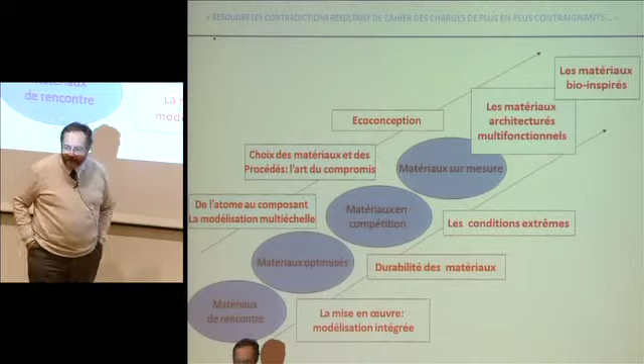We'll discuss modeling again when we talk about the implementation and integrated modeling. Of course, in only one hour we can't discuss all of the issues of durability and behaviors of materials, but we're just going to be brushing upon a few aspects.

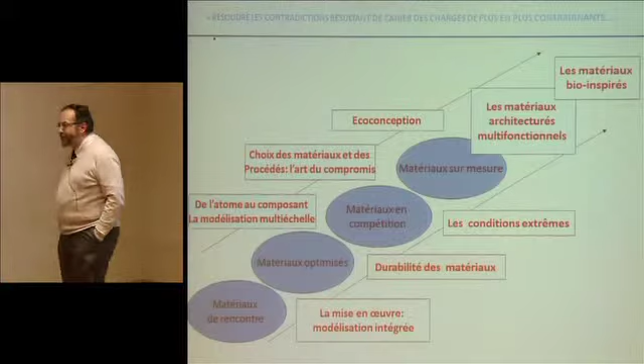The lecture will discuss both wear and creep as an illustration of typical durability problems, and we're going to be looking at a fast-moving trend, which is the self-healing trend for materials. There will be a seminar by Eric Andrieux from INSA Toulouse, who's going to tell us about one of the aspects, which are issues of corrosion.

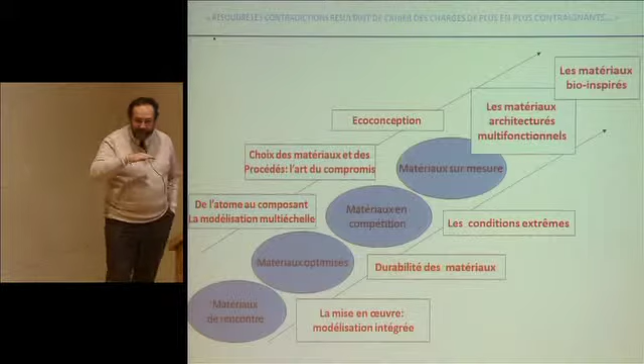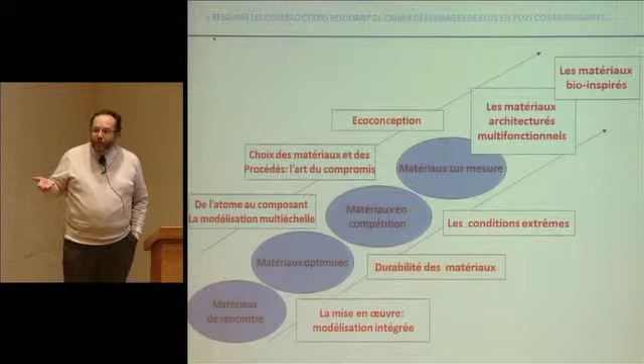And for this afternoon's working group, I decided that we should focus around corrosion, mechanical corrosion. We'll have a certain number of presentations about these issues. So we won't cover all of the problems of materials durability, but just try to illustrate with one given case, which is the case of corrosion, interaction with the environment, and what the questions are that arise from that.

So this diagram is something I showed you already when we discussed problems with design, and I said that what was well developed were methods where you design for infinity, basically for things that last forever. But that doesn't really happen, because there's a certain number of degradations that are going to occur as the component is used. It can be degradation caused by the fact that you have a deferred response.

Deformations caused is what results by creep, where there's only been elastic deformation at a given time. You have fatigue, which is a kind of a treacherous phenomenon, because it looks like nothing is happening, but there's more or less something happening, and then eventually it breaks. If you look at the clip on your pen, you take it in and out of your pocket, and then after a while the clip on your pen drops.

That's typical. And then there's corrosion, and then there's wear, which is basically behavior of materials in time in situations of contact. So in terms of design, there are two ways of envisaging the problem. One is to say, I'm going to place myself in a situation where this is not going to happen. For instance, operating temperatures which are well below half of its melting point, well below the fatigue limit. Of course, I can try and design things like that, but then that means you have over-dimensioned components, not necessarily a good solution.

Thermal treatment, surface treatment, protective treatments - typically what you're doing when you're hardening a surface to make it more wear resistant, or more fatigue resistant. So that's the overview.

What we're going to be discussing today are a few of the key issues in materials durability, and one of these key issues that comes back over and over again is the fact that usually you want to do accelerated testing to say, can I reasonably evaluate the lifespan of the component?

There's a well-known story, I think it was at EDF. He was asked, when's the best time to change a post? And he said, well, it must be just before it falls down. But that would mean very long testing, wouldn't it? So how can you have accelerated testing? Usually what you do is that you increase the conditions of solicitation, increase temperature, increase the stress, increase the strain rates when we talk about materials, but essentially, if you change the conditions of solicitation, you're just accelerating the phenomenon or actually changing the physics of the phenomenon.

That's something that you can find for the durability of nuclear power stations, but also waste storage, engine durability, or turbine blades and so on. How can you accelerate the testing?

Second aspect that's critical is to have a look at the systemic issues that involve materials, environment, and geometry altogether. That occurs a lot in corrosion and wear.

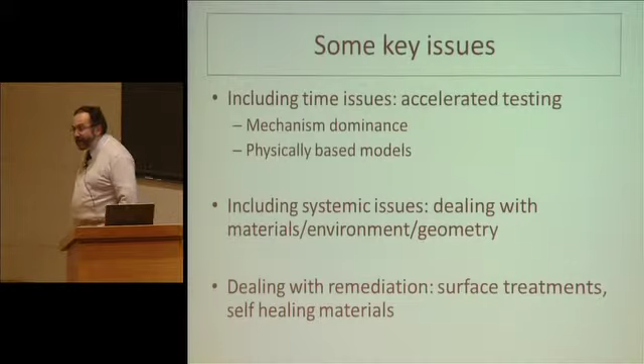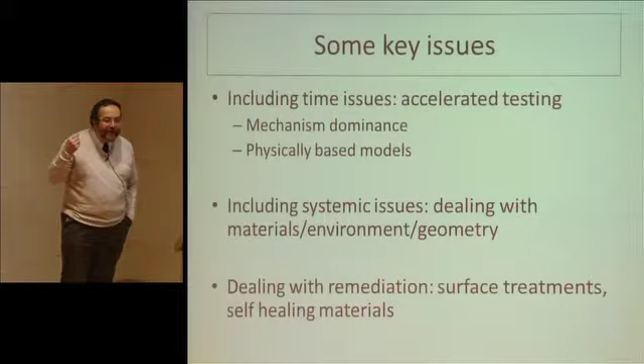And the third point is how can you try to deal through remediation. I told you about surface treatments, but I'll also try to tell you about self-healing systems, which will give us a glimpse of the last lecture on bio-inspired materials. How can you heal the damage as it is occurring?

So I'm going to start by telling you about creep, how one can reasonably expect to have accelerated creep testing. Then the question of wear.

It's actually quite an old approach, but I think it's very valuable and hasn't been sufficiently exploited. What I was saying in the first lectures is that these problems are so major that we often tend to confuse qualifications of materials and understanding of the phenomenon. I think we need to understand the phenomena with materials that allow us to understand.

The case of corrosion, discussed by Eric Andrieux, and this afternoon's workshop, we will hear more about hold-over time in the lecture about extreme conditions. Of course, the seminar will be dedicated to the aging of materials under the effects of radiation, where again time is of the essence.

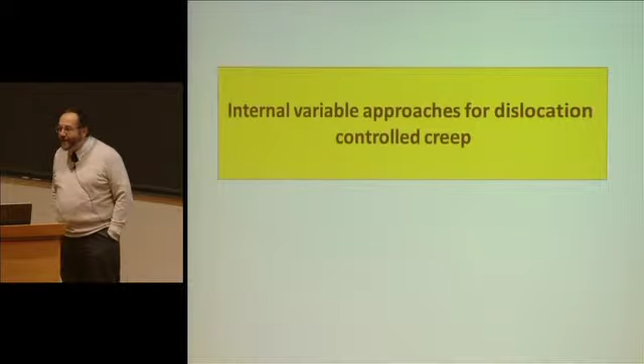So, creep, wear, and self-healing solutions. Creep is actually quite interesting because this is an approach that was developed over the past 20 years or so, used across several systems, with a lot of improvements in the principle, but based on a physical understanding of plasticity phenomena.

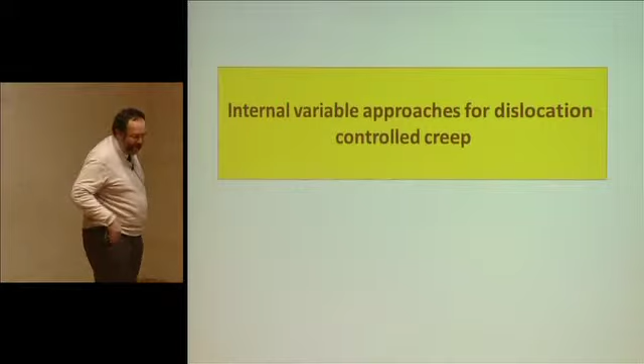The cases I'm going to study are those where the plasticity of the alloys is based on dislocation. The very simple question you can ask is: what if I'm testing traction, pulling—what is that going to tell me about aging and creep, which is long term? So how long, for instance, can I operate a thermal exchange array in a nuclear power station?

The basic idea was to say, essentially, we're trying to extrapolate over time, and in order to do that, you need reliability of the mechanisms. If you change the type of solicitation, you can change the deformation mechanisms, and the result is that you can be completely off the mark when extrapolating.

So this appeared in the 70s, quite a while ago—what were called Ashby creep maps, Ashby again—to say there's a constraint on a material, but it's the constraint versus rigidity, a hardness, at a given temperature. What's relevant here is the importance of thermally activated phenomena compared to the melting point, which is also a measure of the system's cohesion.

So when you map deformation here, we're talking about power of 10, temperature, and then a normalized shear stress. And the idea is that if you have very low stress...

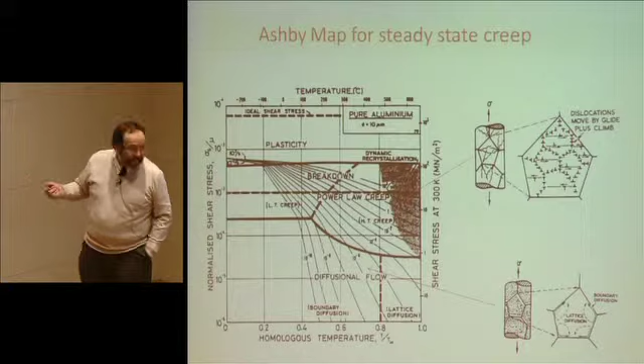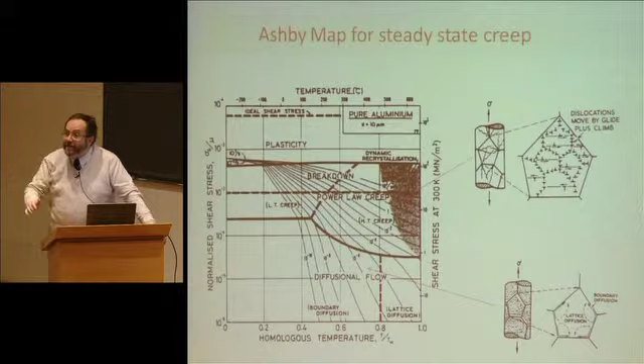So these models open access to stationary creep phenomena. You have a given constraint, a given deformation that is time dependent. Initially, there's going to be a transitionary state, and then an accelerated speed.

And then, in the 80s, under the influence of Cox and others, here it's for highly pure aluminium. The question was, what is the difference between a creep test and a pulling test with an imposed deformation speed.

performed in a system where creep is controlled by dislocation movement? So here the idea was to say that a dislocation is silly and it doesn't know whether it's working under imposed pulling or a creep. So if you test, if you impose a stress with a given speed, a given constraint, in your creep test, you may be able to predict what's going to happen when you apply a constraint and that you're measuring a deformation speed.

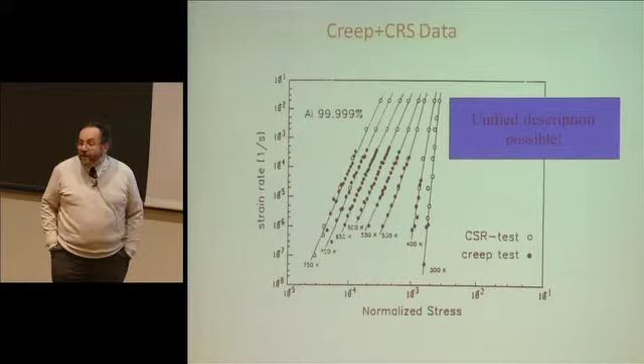So you have a few tests here that were carried out at different temperatures with different degrees of stress, of strain. The creep tests are the full ones, and the other ones are the hollow ones, and essentially they are actually quite well aligned. So at least in these scales of temperatures, there's no real reason to believe that you have different types of deformation.

And it's not always the case, but it was here. So if you continue the parallel here, and if you say that dislocations are stupid beings, if you have a stationary, a constant creep condition, it's essentially stable, and speed of deformation is essentially stable too. You have the deformation speed based on deformation, you have a transitory period here, you have secondary creep, which is stationary, and then the material is going to become damaged. Of course, damaged means different things, but basically, for a given constraint, deformation accelerates.

If you look at a stationary creep, minimal creep is a stationary structure dislocation state. But if you look at the behavior in terms of speed of imposed stress, the state of saturation in this type of test which you can obtain with very high deformation, and the equivalent in terms of imposed stress, speed in the stationary state in creep. So it was quite simple here.

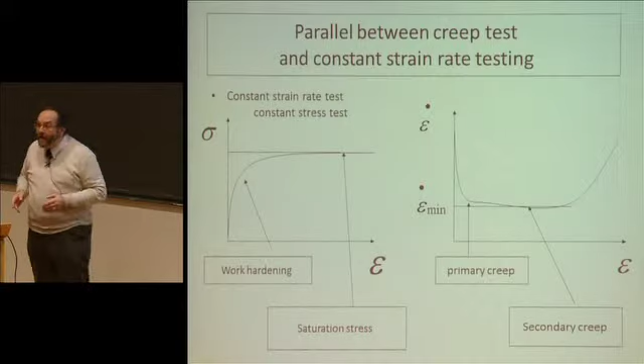You have a dislocation density that's essentially constant because of the balance between what you're creating and what you're annihilating. When you have more and more, they tend to annihilate each other more easily in pairs of dislocations, plus B minus B, and you have a dynamic balance with a defined speed that should describe the stationary condition, which is dynamic with imposed constraints.

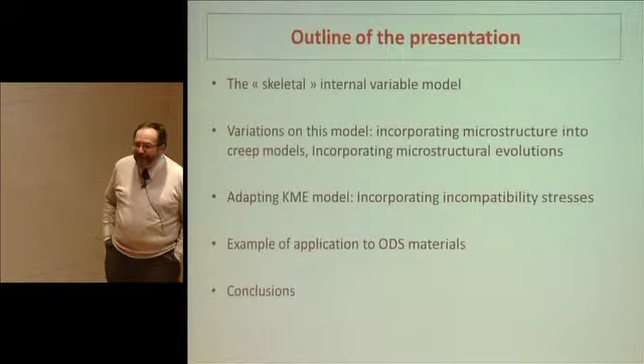Let me start by showing you internal variable models, and I think they're actually excellent value for money. They're simple but allow you to explain lots of things. We'll then see variations on this model, incorporating microstructure. We're going to see how incompatibility constraints can be built in, how we can try to describe certain types of ODS materials, some that are actually ill-adapted, unfortunately, the ones that we really would like to be using, and then we'll reach today's conclusions.

So, the skeletal model, the most elemental model in terms of the approach of variable internal plasticity, is that you have one variable: the dislocation density. So, of course, you can fine-tune the model. You can have fixed, mobile dislocations in the different planes. You can make things much more complex if you want to. But what can you do with the simplest version?

Second point, the dislocation motion to overcome obstacles contributes dominantly to plastic strain, where direct diffusional flow is dominated by the deformation by dislocation. Other obstacles can be either other dislocations or fixed obstacles, such as grain boundaries, precipitates,

and they control the mean free path of dislocations and the dislocation storage kinetics. They're going to be terms of annihilations. They can be annihilated in pairs, and then they're going to be terms of storage, which are essentially going to be the obstacles encountered where they can't move further.

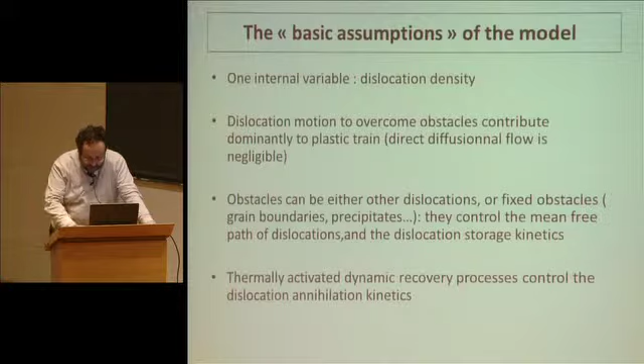And then the dynamic recovery processes control the dislocation annihilation kinetics. So the basic model here, which you can work on indefinitely, is the Kocks-Mecking model, which is also very simple in principle.

There's a relationship between speed of deformation and constraint, but the idea is that it should be considered not as such, but in relation to the intrinsic resistance of the material you're examining. This intrinsic resistance is that of the crystalline network, but as you are deforming the material, you're accumulating dislocations, which increases the material's resistance.

So the Kocks-Mecking model is designed to normalize the constraints you're applying based on the resistance of the material, which itself is connected in a pure metal to the dislocation density within that material. That's the meaning of this first equation: the constraint normalized by the reference constraint, sigma with a circumflex, must be equal to the speed of deformation normalized by the reference speed of deformation.

And the idea is that the reference constraint is the square root of the dislocation density. So you're actually overcoming the obstacles, which is essentially dislocation. You could also add precipitates, grain boundaries, and so on.

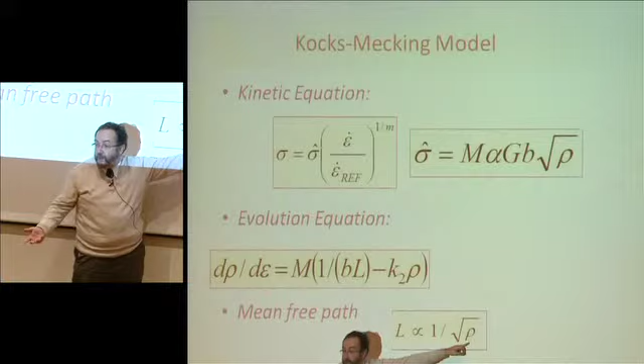So what remains is, what is the mean free path here? When I only have dislocations, it can be connected to this amount here, the average distance between dislocations. If you add precipitates or grain boundaries, the mean free path is going to be modified by these new obstacles.

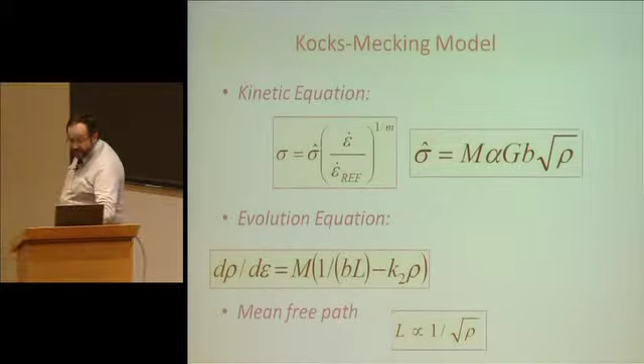So this can actually be integrated easily, and by a sort of miracle, you end up with a Voce law, which was developed long before these approaches were developed. It's a classic description of mechanics for plasticity with saturation.

And what you have here, in fact, I don't know why it turned into bright purple, but you have this Voce equation here. The difference between that and a purely phenomenological interpretation is that you have a direct interpretation of various parameters.

So in the law of Voce, the constraint at saturation is going to be connected to the storage rate and annihilation rate, and the θ2 term that you have in this deformation is essentially how the deformations are going to be stored initially in stage 2 of the deformation.

You can very well integrate the equation in the same manner, not with a constant speed, but with a constant constraint. What you obtain is a Voce equation for creep, rather than for imposed deformation speed.

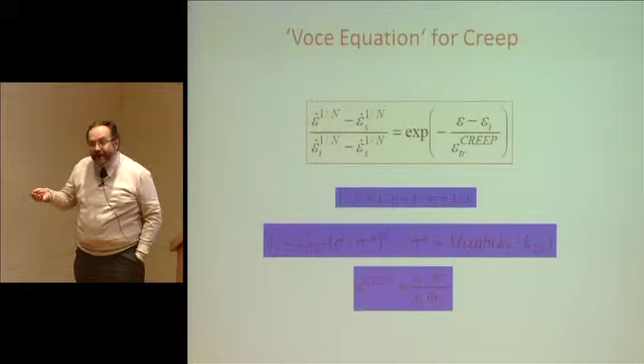What you can do is test. You can have tensile tests at different speeds. You can have jumps. You can have tensile tests carried out at different temperatures, and based on that, you can extract the parameters allowing you to adjust your Voce traction law and use these parameters to predict creep.

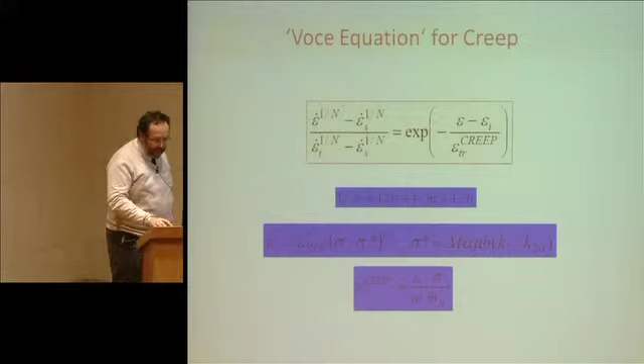So obviously you do have the first part of creep. It won't give you the tertiary creep because other mechanisms become involved at that point.

So if you want to have variations of these models by including, for instance, microstructures, what you can do is inject grain size. Incorporate grain size that's going to appear in the mean free path. When the grain size is above 20 microns, that can very much have an influence on the mean free path.

When grains are smaller, you're going to feel the dislocations in the grain more in terms of dislocations accumulating, and there are going to be other terms here, terms of internal constraints because of grain-to-grain incompatibility. Usually when you reduce the size of the grain, the more you do that, the more you're going to need to look closely at dislocation.

Then if you want to include a precipitate, the most natural way to do that would be to include it as an additional threshold. Say the dislocation must cross the precipitation constraint plus the obstacles linked to dislocation. So depending on how strong the obstacles are, it'll be either a direct average or a quadratic average.

You can fine-tune that too, and you can also have precipitates that serve as storage for the dislocations. You can have dislocations that store around precipitates. That can actually be quite subtle, because once they're stored around the precipitates, they can or cannot remain where they're being stored.

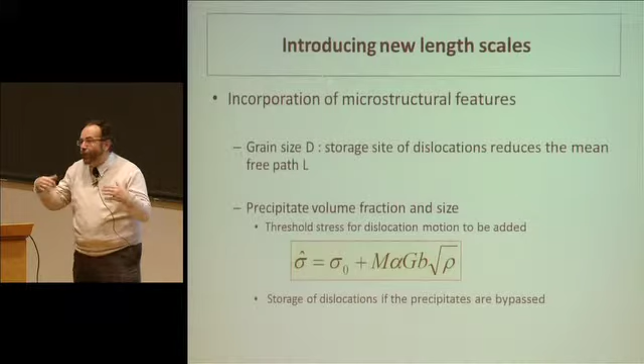What I'm showing is a large ramification of models, allowing you to take more and more phenomena of microstructure into account. The benefit of these types of approaches is that creep tests are much longer than tensile tests, so you use tensile tests to try to predict creep.

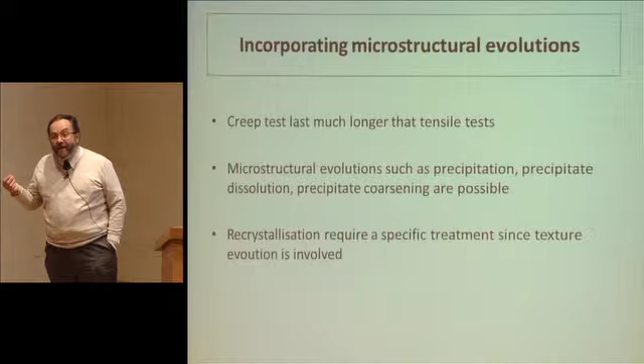Microstructural evolution, such as precipitation, may itself depend on time. While you're carrying out your creep test, since it's going to be much longer, the precipitation state in the material may actually change in the course of the test. Recrystallization may occur when you've got a deformed material. You may also need to include possible changes in texture and dislocation density, with phenomena indexed on time rather than speed of deformation.

One way of including these variations, well adapted in some cases but not others, is to evaluate separately the time evolution of microstructural features. That's the sort of thing that can happen when you have precipitation which over time is coalescing. I'm not creating a new phase, I merely have the same precipitates with the same volume fraction, but they are increasing in size.

You're changing the distance between the precipitates and therefore the mean free path, and you're also changing the storage capacity of the precipitates. Therefore the changes of microstructure happen much slower than dislocation changes. So you can reasonably separate the two approaches, having both an evolution equation for the microstructural parameter and an equation for changes in dislocation densities for a common value.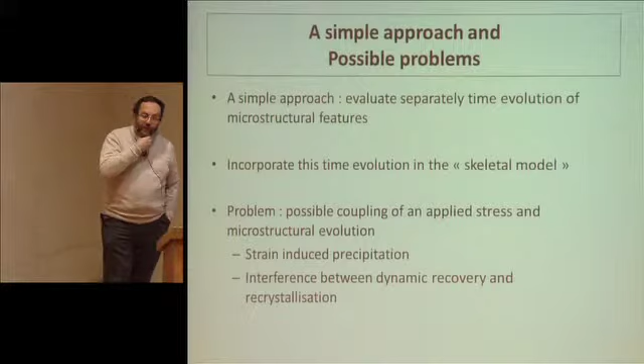Here you can feel that this is probably going to work as long as the microstructural change is not too dependent on the constraint. So in fact, the bigger your precipitates, the larger the chances it's going to work. You can gradually include the physics you need in order to see how the microstructure changes while also changing dislocation densities.

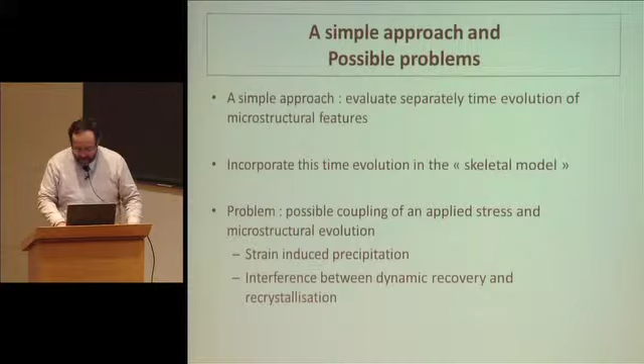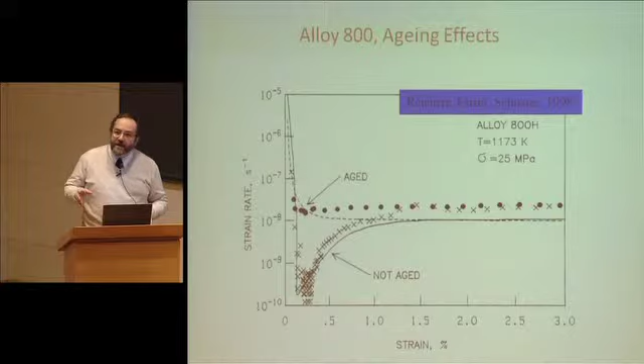Then you carry out the same test with a material that is not aged, a material where you have a situation where precipitation can occur and then the precipitation state can coalesce. This is what is done here. You have the experimental points, little crosses, and you have the forecast behavior with experimental points that takes the evolution in the microstructure into account, with precipitation kinetics and then coalescence kinetics. So typically this is what you can do in some instances where you can reasonably disconnect microstructural evolution. It's not always the case, but in some cases it is.

So if you now want to discuss polycrystalline materials with variable textures, you need to get back to basics. You think you're imposing a constraint, but the material actually can't see that constraint directly. It sees the constraint linked to the fact that the grain in which it sits is influenced by other grains that are not deformed in the same way, or that the material contains inclusions which have not deformed while the rest of the material has.

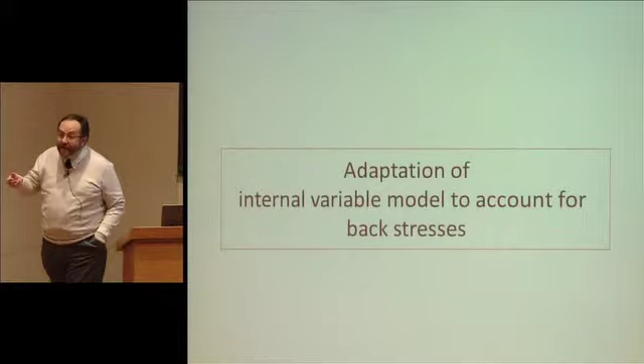So you have a constraint which is polarized. One way of taking that into account is to say the dislocation cannot feel the constraint that's being applied. It can feel that constraint minus an internal constraint that's preventing it from moving. And obviously you're going to have to compare that with a reference constraint, which is the obstacle constraint.

So I'm going to show you how you can try to do that. This is model zero, the Kocks-Mecking-Estrin model. The idea is that the dislocation does not see that constraint directly. It sees the constraint minus the internal constraint, and the obstacle it needs to cross is not just a dislocation—there's also lattice friction.

So what you're going to see here, this is what was done on zirconium alloys, is that the internal constraint is not just an incompatibility constraint. You're actually building incompatibility, but it is itself relaxing, slackening, with kinetics that are not necessarily the same as those connected to deformation speed or the movement of dislocations. So what you have here is a formulation of this internal constraint relaxation.

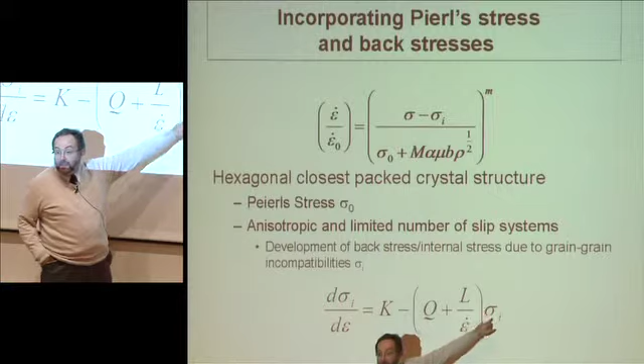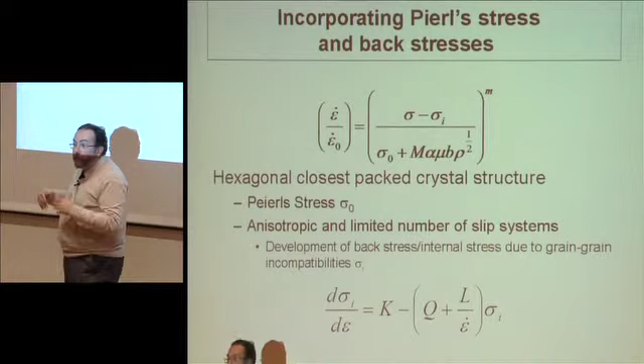Here you need to go into real mechanics of polycrystalline materials, and then you relax those proportionally to the amount of stress already present, either independently of the deformation speed or dependent on that speed. So you can have diffusional relaxation or relaxation through rearrangement of dislocations within the grains. That is the type of prediction you can have for deformation speeds based on creep deformation with simple tensile tests.

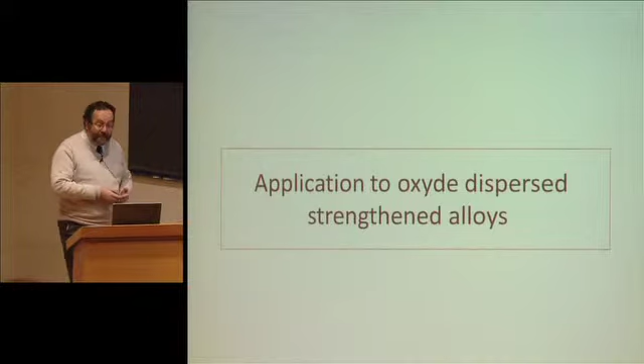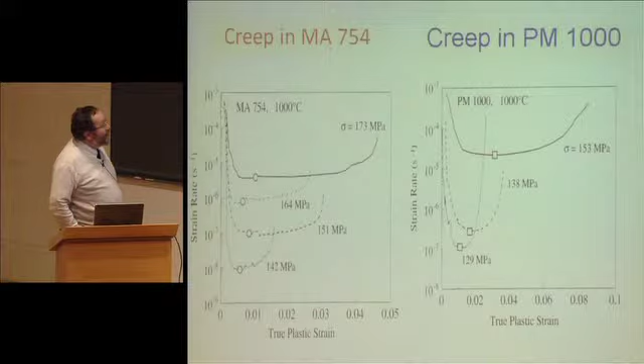Here you have these creep tests carried out based on constraint deformation, and you can see here 151 megapascals. You can actually fall dramatically in creep speed.

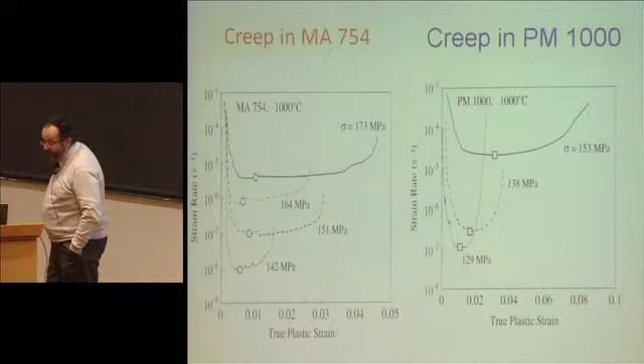It's exactly the same procedure as what I showed you earlier. You have traction tests with speed jumps, temperature jumps. You describe all of that with a Voce model modified by the fact that you're storing dislocations in the precipitates, and that your precipitates are also obstacles. Based on that, you can deduce the deformation speed.

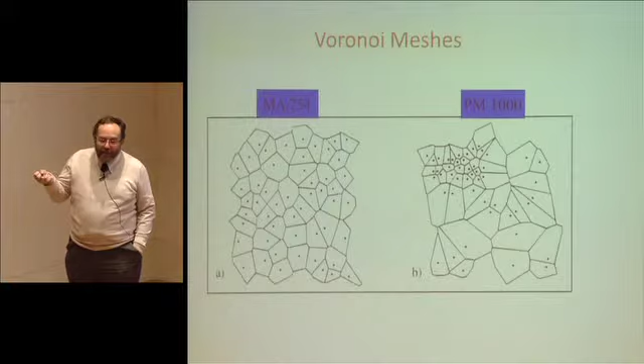Just one thing before we end that description: how do you take into account the fact that the particles are or are not dispersed homogeneously, depending on the design process? In fact, there are two ways of doing that: to have Voronoi meshes and see what the local fraction of particles is, and having an approach, a polyphase material deformation approach, where you say each grain has a local volumic fraction.

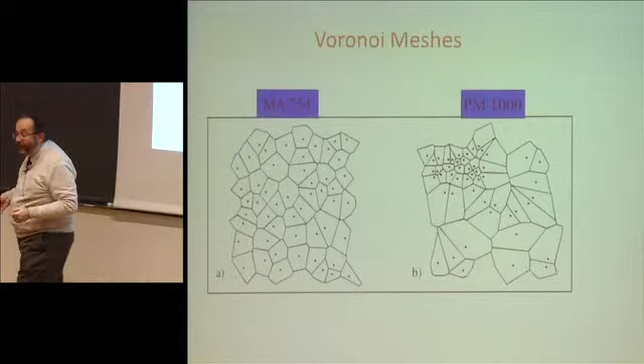So now, to finish with this section, I'm not saying that it's always possible to have tensile tests to determine creep, but in fact with very few ingredients, it's possible to have a description that can gradually include materials physics.

Let me give you a second example of durability: the example of wear. I'm not going to go into as much detail, but just show you an overview of how you can understand wear in materials, again based on the question of the local mechanisms involved. And here, I think these approaches would actually deserve greater experimentation on simpler materials than what is usually used.

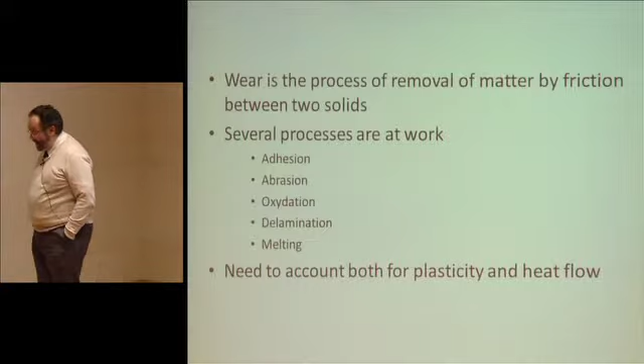What is wear? Wear is the process of removal of matter by friction between two solids. These are situations that are pretty annoying because you have two materials, and you have a geometry which won't be the same: rubbing a pin, a pawn, or a cylinder. And then if you have a lubricant, hooray! But if things are happening in an atmosphere that's slightly chemically aggressive, you're sure you won't understand a thing. But you can always try to see how you can envisage the problem to gain some understanding.

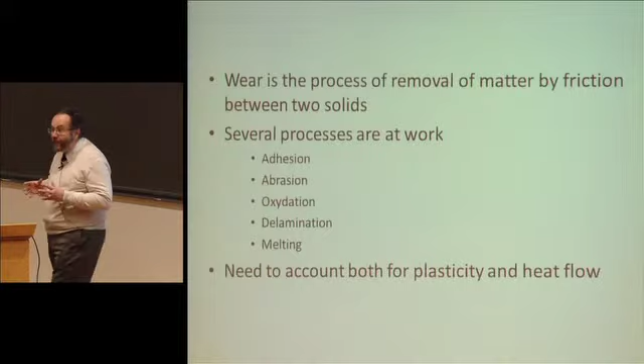There are several processes at work in wear, similar to the processes active in creep. The difference is that in creep you have few active processes, so you can have creep maps that are bottom up: you describe reliable models and then, based on these, try to build creep maps. With wear, things are much more annoying because you can only rationalize empirical maps. You have a number of mechanisms: adhesion, abrasion, wear by oxidation, delamination, melting. It depends on the speed at which you're rubbing, the force at which you're pressing, the temperature. All this is happening.

The experimental parameters you have are a load, area in contact, sliding velocity, and mass loss. The material parameters are, of course, hardness - pretty simple, you're not looking at sophisticated things such as elasticity limits, you just want to know whether it's hard or not. Then you have thermal diffusivity: you're creating heat through rubbing which diffuses across the material - it's not the ambient temperature, it's the temperature where the rubbing is happening. That leads you to create dimensionless parameters: force characterized by F and AH, speed characterized by a characteristic speed connected to the size of the contact, and diffusivity.

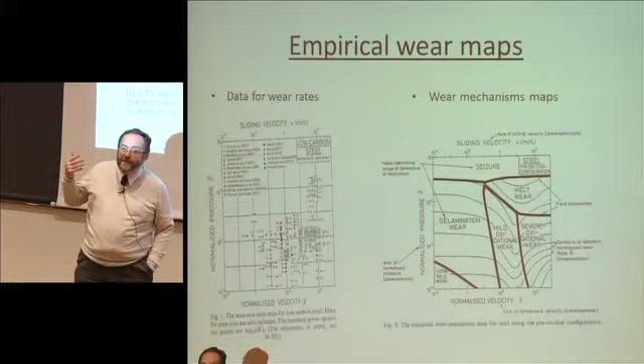So the empirical wear maps, you have them here. There's a whole lot of data brought together by Mike Ashby on low carbon steels. To the right you have something that can help you rationalize that with the dominant modes of wear. And if you want something that lets you discover what's going to happen over time, you must stay within the constraints of stress solicitation. So how are these maps derived?

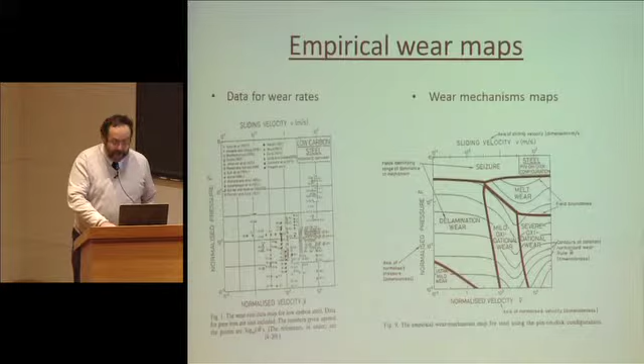I'll just give you the basics. The first thing is that you really need to characterize the temperature of sliding surfaces

and to distinguish between the overall temperature and the flash temperature on the asperities of the surfaces. You're going to see the various types of wear, either because you have welding between asperities, because you have melting, seizure, oxidation wear, or just because you're tearing off matter. You've reached maximum ductility and therefore you're removing materials.

And then what you're going to do is draw a map of these dominant mechanisms, so a few simple hypotheses. The reason I'm giving you this example is that it looks really incredibly complex, but in fact you can describe it with a few simple points.

In fact, most work coming from friction is turned into heat. First thing you need to know. Second thing, heat generated at the contact between the two materials diffuses into the material. Third point is that there's a difference between the average bulk temperature and the local flash temperature, between two asperities that are being sheared.

And we're going to try to calculate these. So what you need to bear in mind is very simple. When you have two metal materials that are in contact, there are going to be asperities that are touching. So of course it's the points that touch, so you have huge constraints.

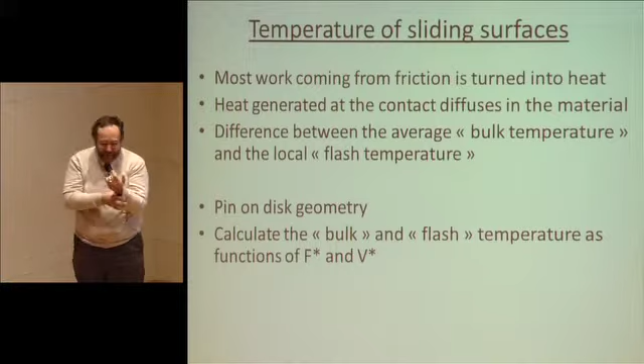This was evidenced by Bowden and Tabor in the 50s and had actually already been tested by Maxwell. He wrote Maxwell's equations, and he thought it was okay to look at these friction forces, and he'd merely measured the electrical conductivity of two metal solids in contact.

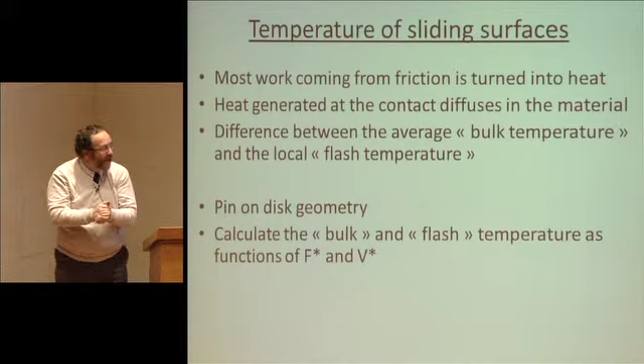So the idea here is to take a geometry of a pin on a disc and try to calculate the temperature generated at that particular place. So the ingredients are, of course, friction coefficient, force, speed, dissipated power divided by the nominal contact area.

It's going to be an input flow, which is going to, at least part of it, be diffused into the contact, the other into the disc, and the respective fractions, of course. There you need finite elements to try and figure out how they separate. The characteristic length is also something that you're going to need to calculate.

And then you have the diffusion flow and determine that it's going to be the difference in temperature between the contact temperature and the nominal temperature divided by the characteristic length, multiplied by a thermal diffusivity quotient. So you can see what the temperature of contact will be based on the material temperature and a whole bunch of stuff depending on the normalized speed, among other things.

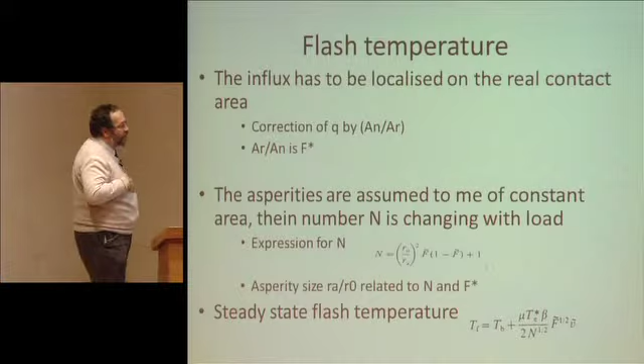So once you've obtained that, the next step is to look at how you can go from a pin to disc contact to asperity contact. So you need an additional input here, which is the number of contacts. What mechanics can give you directly is the total contact surface, but you can have either a lot of little contacts or a few large ones, and you need to factor that in, and that gives you the flash temperature.

Based on that, the type of equation you're going to obtain to resolve this model - I won't go into the finer details, but basically the physics I've just described, combined with algebra, lets you deduce the flash temperatures at the asperity, based on normalized speed and normalized pressure.

Once you've done that, you haven't really calculated the rate of wear. You need to couple that with a mechanism that results in wear. It can be that I'm creating a little bit of oxide which is being removed, so I need to know how fast the oxidation layer is going to thicken. Or I locally melt the material, and some of that material is removed. There you need to balance the latent heat of fusion with the flow of heat you're creating.

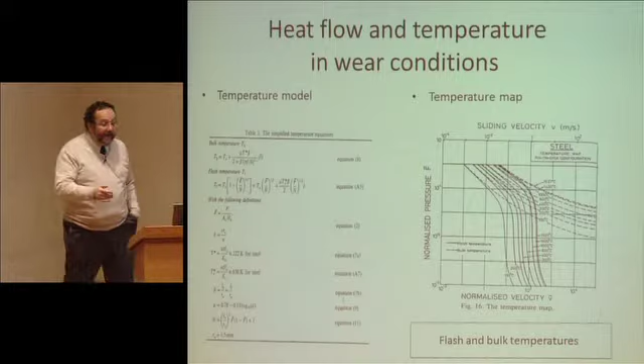So these are the various mechanisms involved, and based on these different mechanisms you can obtain a dominance map, not only in terms of wear, but also a wear dominance map with equivalent lines of speeds of wear.

I'll finish now, because time flies, with the final point for this lecture, which is truly in the making. These are issues I think have become indecisive - not practically, because there are a lot of interesting, sophisticated studies carried out with industrial materials, but it's being done less and less with model materials. I think it's a big problem in durability, the fact that you should take the time to have model materials to understand oxidation, corrosion, wear, creep, and have an approach that brings you back to the basic mechanisms.

But here's another extreme case, something that's really in the making: the field of self-healing materials. I'm going to give you one example of a self-healing material.

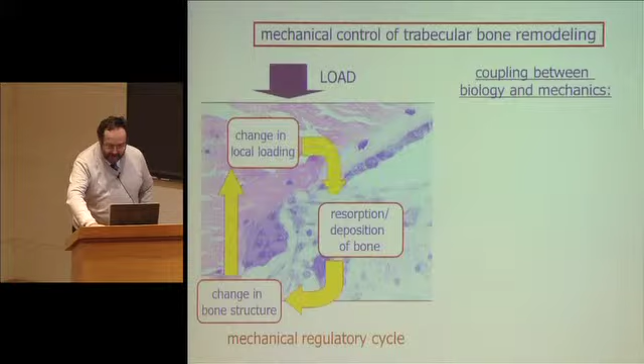So obviously that is pretty much the ideal situation. Of course, we'd like to be able to make something as good as bone, that can bring substance to where it's needed automatically. That's a big process called self-healing materials. It's been pretty much examined over the past four or five years, and there are quite a few examples - you can have elastomeric reinforced polymers, or, a classic case, phase-transformation toughened ceramics.

So in fact you're healing a crack when it starts to propagate. And there's another fine trick: polymers which contain encapsulated repolymerizing compounds. So when a crack happens, it breaks the capsule, which releases a polymerizing agent to close the crack.

Pretty smart, but it works very well in materials that are already pretty much a disaster anyway. So, in fact, you're repairing a material as it is damaging. You can feel that it's not as good as bone, of course, because once you've released the repolymerizing agent, if a second crack appears, too late. It can only happen once, it's a one-shot gun.

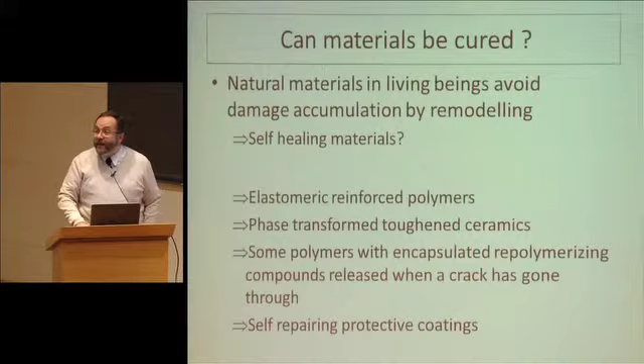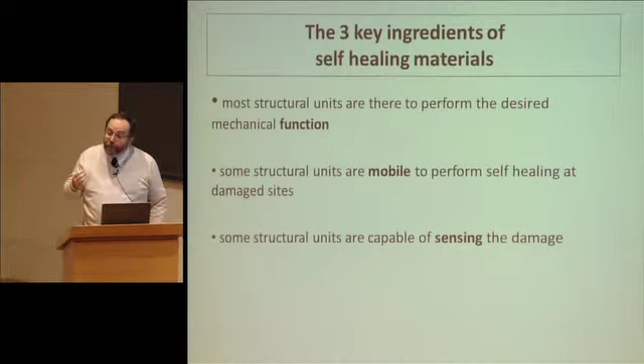If you look at these self-healing materials... there must be obviously things moving in order for a material to heal itself. They need to move, and they need to move together at the same time as the damage is occurring. And for that to work, there needs to be a fit between the damage timescales and the healing timescales. That, in a sense, is going to create a kind of grid of what can reasonably be your wish list, or your letter to Father Christmas, as it were. And then, of course, you need to have a capacity to feel the damage in order to sense it and repair it.

So there are two broad families of self-healing materials. There's the ideal ones, where it repairs the damage at 100%, where it could repair itself an infinite number of times, where the repair is autonomous. You don't even need to tap the material's shoulder and say, hey, come on, man, self-repair. Then, of course, the repaired material has better properties than the material it replaces, and it's cheap. That's what I would call the letter to Father Christmas.

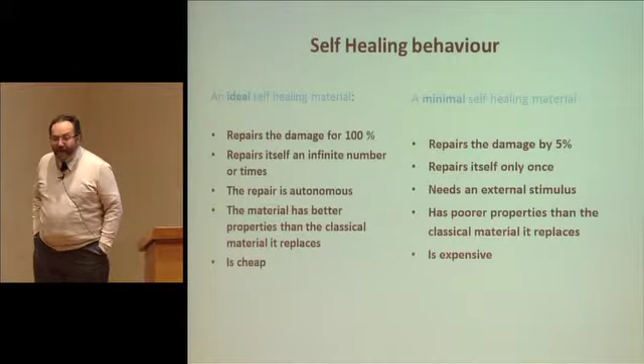On the other side, you have the reality of things. Usually, you never completely repair the damage. You avoid huge damage, like the material snapping. Usually, it only works once. Very often, it needs external stimulus, resulting in damage, and it has poorer properties than the material it replaces, and it's usually more expensive. So, a pretty depressing picture, but it's very interesting nonetheless, as long as you have a chart allowing you to evaluate whether you have chances of it working or not.

This is one example of what this could look like. Hang on a minute, bear with me. You're going to look at the various types of damage and the various types of healing.

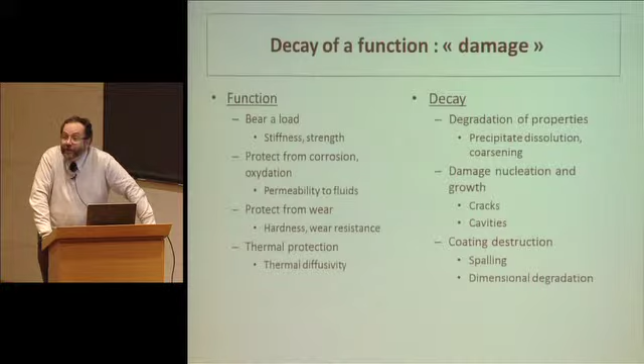Imagine the function. If the function, for instance, is to bear a load, the degradation properties will involve dissolution of precipitates, a coalescence. If you have protection from corrosion, it's the permeability to fluids that's going to be important. If you look at protection from wear, it's going to be hardness and wear resistance. Thermal protection, it's going to be thermal diffusivity. If you look at the type of decay that can happen, it's going to be, for instance, cracks, cavities, a destruction of the coating.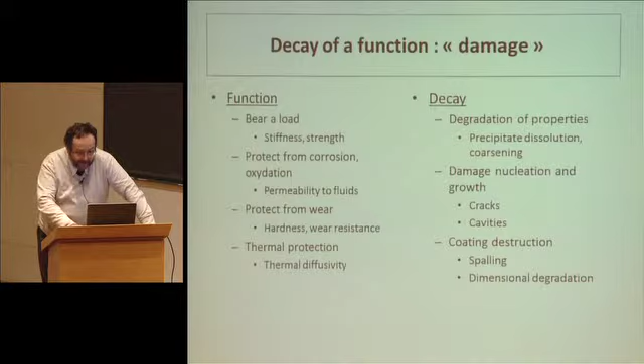And what we're going to need to look at is the type of healing that you can imagine. If you have precipitate dissolution, the healing is reprecipitation. If you have an interface rupture, you need to reform it. You can have crack closure, as I was showing with the propagation of cracks in PMMA. You can have things as simple as saying that if you have an acute crack, if you can find a way of rounding the bottom of the crack, maybe you can prevent further degradation. So you have the variety of materials, the variety of damage, and the variety of healing methods. What I really wanted to show was how you can have a simple scale to read all of that.

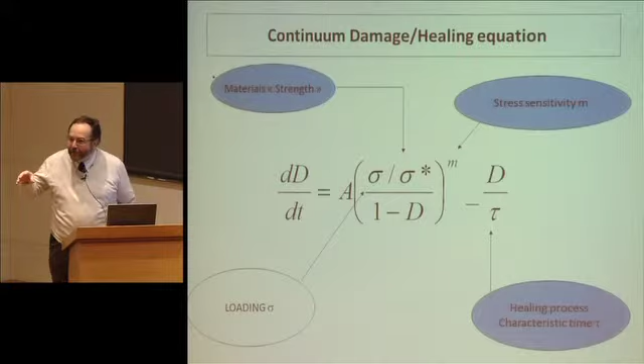You have a parameter that you're going to call damage. This parameter is linked to the stress suffered by the material, worsened by the fact that it's already damaged. Here you have the classic Kachanov equation of damage. Then what you're saying is actually healing, with a characteristic time that depends on the mechanism—is it diffusion, precipitation, or so on? And you can see that the characteristic time is going to vary.

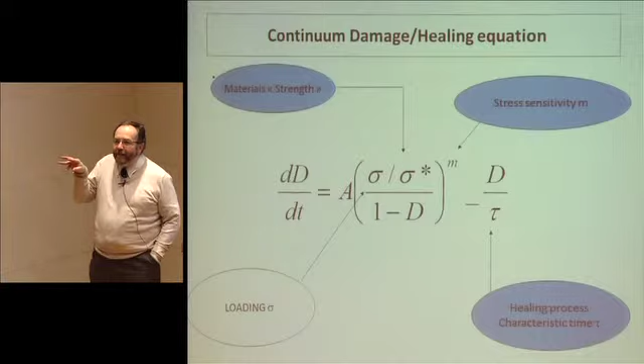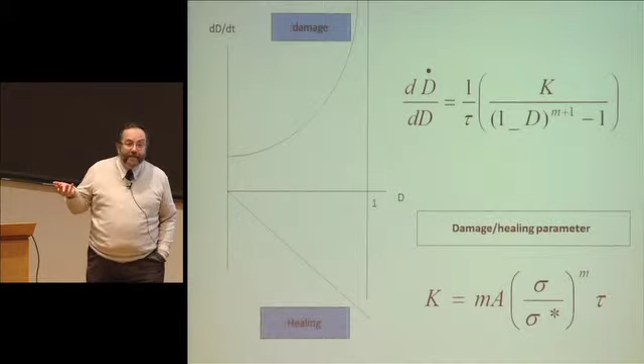So when you do that, something appears very naturally: the rate of damage that can be created, induced in the material, over the characteristic time of healing. If that ratio is very high, it's going to be tough to have a healing mechanism. If it's low, you probably will be able to have a self-healing mechanism.

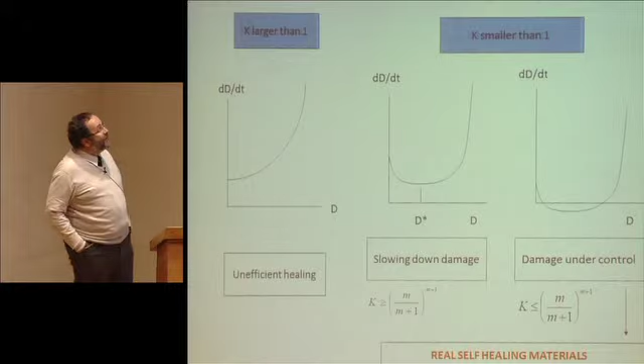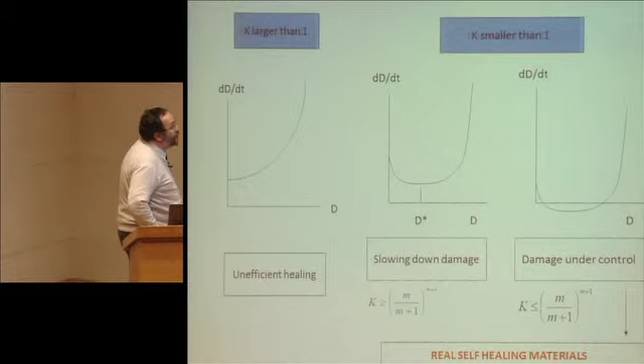So that said, you've seen the essential—you have three types of behavior. You have one where, if the rate of damage and a parameter k give a lot of damage and not a lot of healing, the damage accumulates, and you know it's going to reach a nasty end. But you have two other situations.

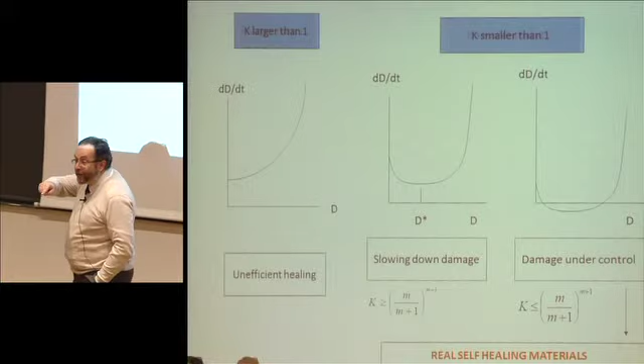Depending on how the rate of damage connects to the sensitivity to damage, either you have a situation—very nice here on the right-hand side—where damage actually decreases as it occurs and reaches a stationary point. If you start with this state of damage, it accumulates, and then it stays stuck here.

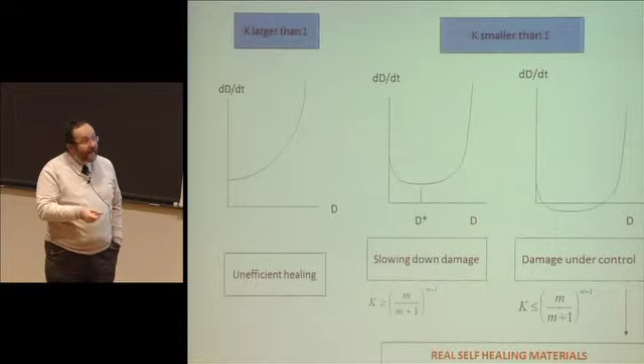So you have a system that's going to damage itself, and then things calm down. Here, the system damages itself more slowly, and then starts again. And here you have really a slowing down as well as a self-healing.

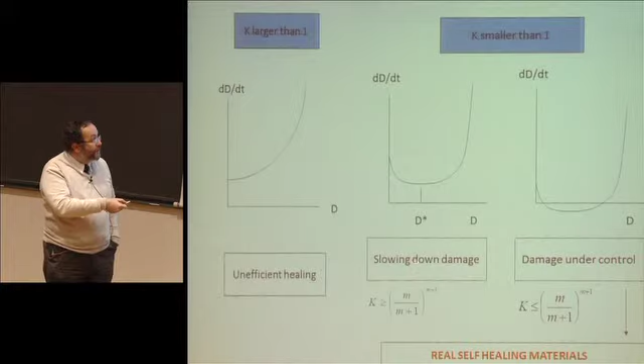But what I'm basically showing is that it's very simple, with parameters that are sensitivity to stress and the damage rate, and a parameter here that takes into account both the rate of damage and the characteristic healing time. You have simple rules to tell you whether or not there is a chance of obtaining a self-healing mechanism that can be efficient.

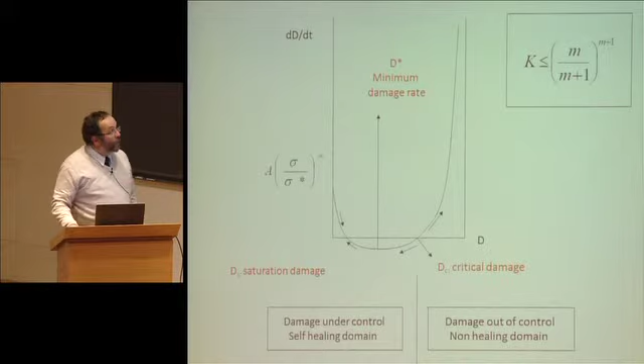So let's look at the detail. You have the damage rate here. If you start from here, you reach point 1, meaning things are not looking good. Essentially, you have a saturation damage zone where you always have controlled damage, and then a zone where you get more damage regardless—wherever the self-healing principle stands, you'll never make it.

So I'll skip the algebra and reach the conclusions on time. What I've tried to show you with these two cases, that of creep and that of wear, is basically the rules that allow you to find out whether you can extrapolate rather than just interpolate.

The rules that have emerged are rules of identifying fields of dominance, regions of dominance between different mechanisms, and within those, to start with physically based, microscopic models. For creep, microscopic means interaction of dislocations and microstructures; for wear, it's the dynamics and thermics of asperities that are in contact.

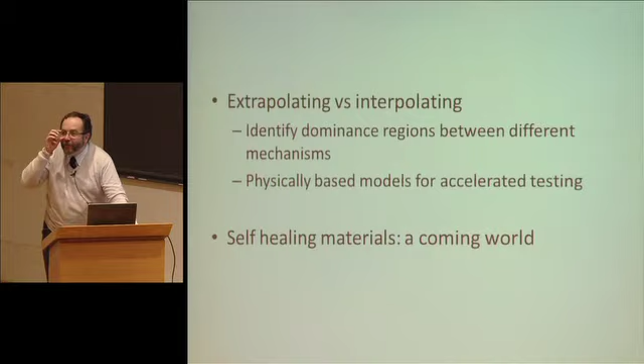You need to use those to obtain models that can be extrapolated, while remaining in a class where the dominant mechanism holds. And then, as an answer to these problems of durability, how you can mitigate the damage or even have a mechanism that tries to reverse it by healing. What I wanted to show you was a vision of the various approaches, to see whether or not it was worth moving in that direction.

So thanks very much for your attention, and I shall now yield the floor to Eric Andrieux, who will tell us about corrosion.